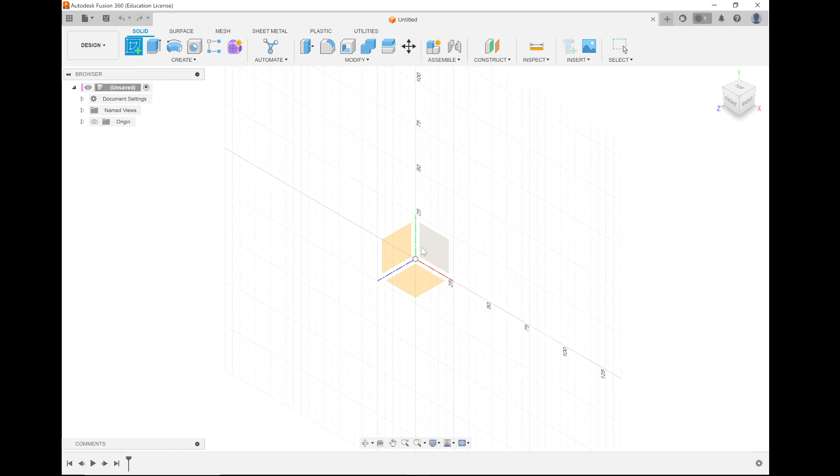So for this one, I'm going to start by doing my sketch button up here in the top left. Let me just check that this is showing up. Yep, cool. The sketch button, which is in the top left, you press this. I'm going to press a plane, this plane over here. So now I'm looking at it in a flat view. I'm going to do the rectangle.

So my general approach for this bridge, I'm going to do one half of the bridge first, and then I'll flip that so we can do the other half, and then I'll flip that again. So when I mean flip, I mean mirror. I'm going to mirror it first to get both halves of the bridge, and then I'll mirror it again to get the left and right side of the bridge.

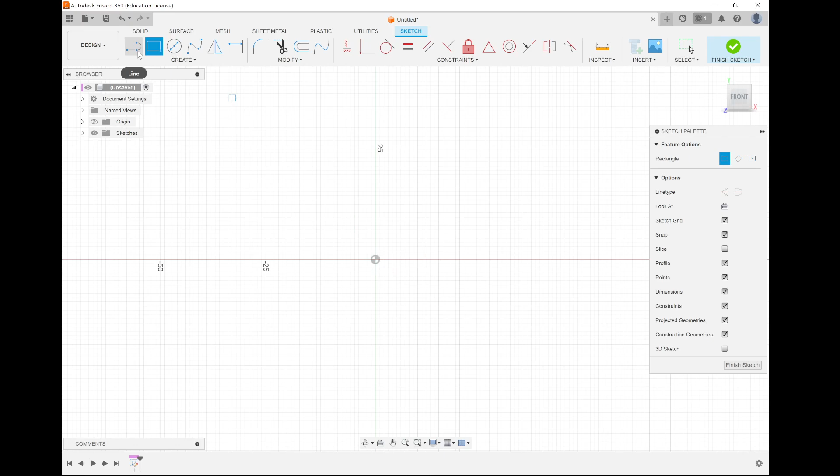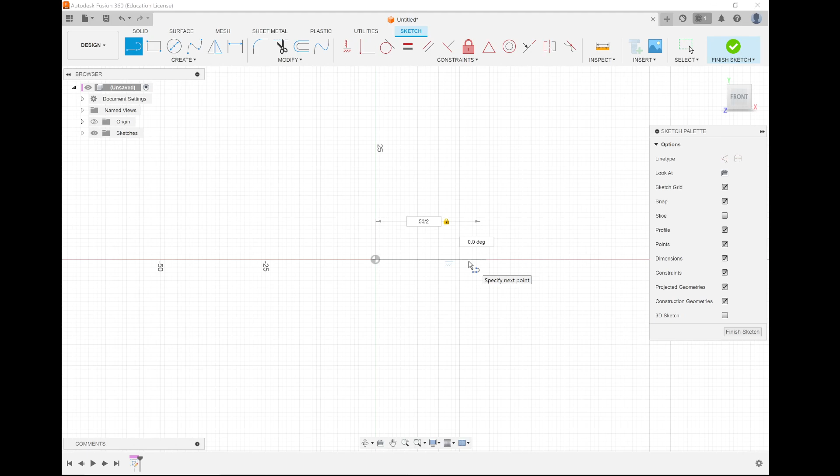So I'm going to start by, we know our balsa wood blocks are 5 by 5 millimeters. I'm going to pick a spot. I'm going to assume my bridge is going to be 5 centimeters wide. So if I'm assuming this crosshair in the middle of the page is the middle of my bridge, I'm going to get a line and send it out here. I'm going to do 50 divided by 2, which remember you can plug simple equations into your Fusion 360 distance line. So 50 divided by 2, press enter, and now I have this line here. I'm going to use this as a construction line for my bridge.

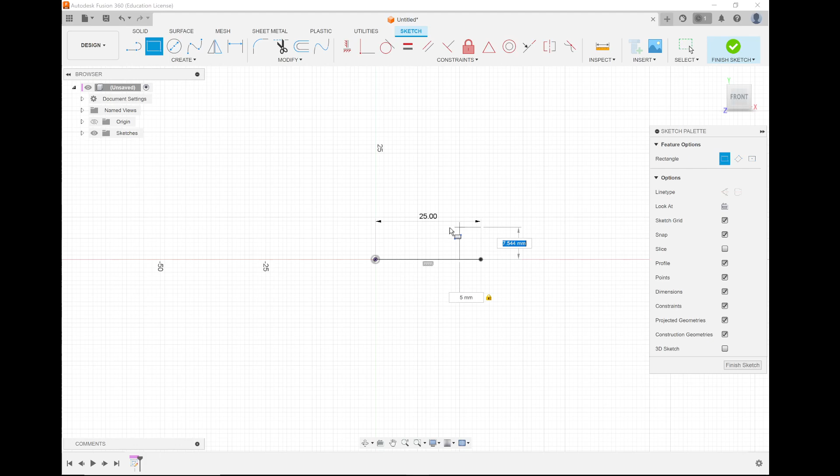I'm then going to press the rectangle button. I'm going to press this corner over here, and I want to do a rectangle going out this way. That's going to be my balsa wood. This one's going to be 5. I can write down 5, and then if I press tab, it goes to the other line where I can press 5 again, and then I press enter. So now I have this square.

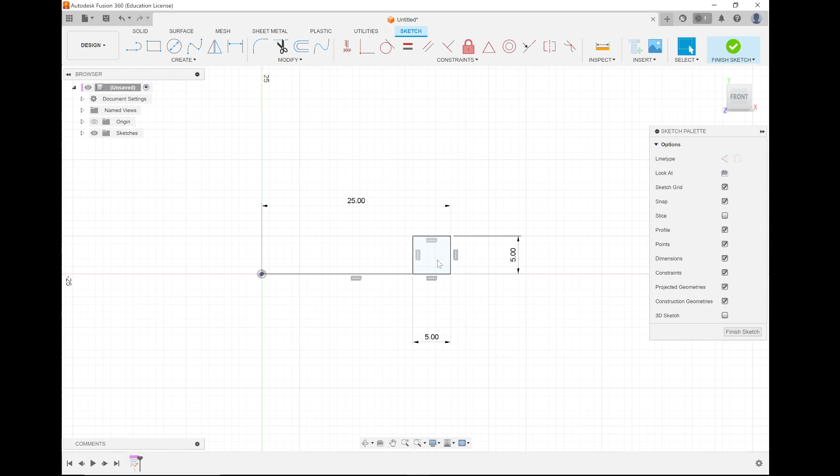In Fusion 360, this is a bit difficult for you to see on the projector, but when you look at the video, this over here is like a pale blue color. This pale blue color means that this is a closed shape, which means I can then turn this into another shape later.

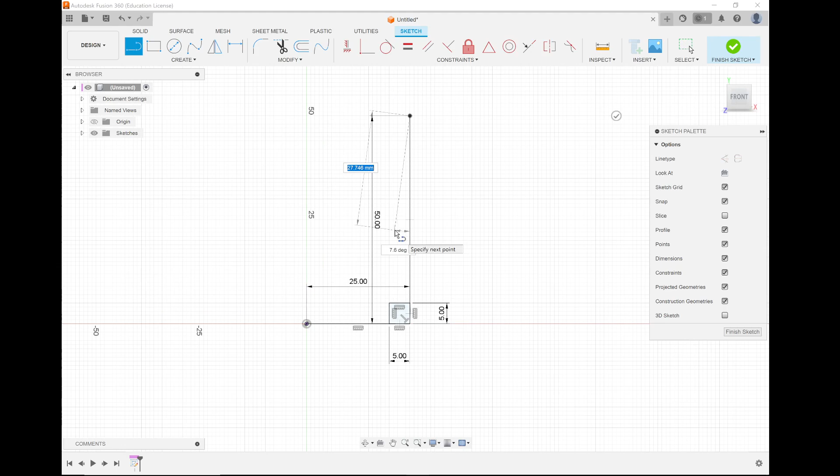And while I'm here, do I want to make the other shape as well? Yeah, I'll make the other shape as well. Let's say I want my particular bridge, if it's 5 wide, I want it to be just as high as well. So this time I'm going to go up here to 50. Does that make sense? Okay, I want to go up to here to 50. Press escape. Over here, press that corner. Go 5, tab 5.

So over this will be my 2 lengths of the bridge here, and I'll press finish sketch. So now I have these 2 lines over here. So these 2 squares that are from the central axis, they are 25 millimeters, let's say, to the right, and from the extremities, they are 50 millimeters from each other.

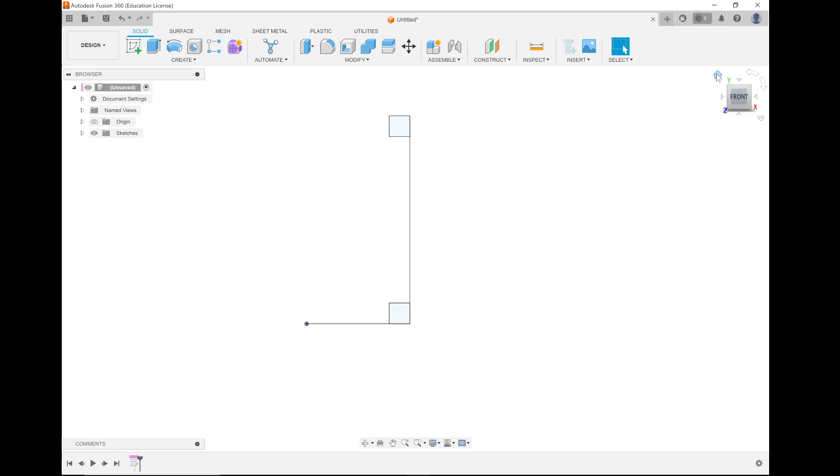For this sake, I'm going to press this home button over here to change our view so we can kind of see it in 3D. It's going to help us when we turn this into a 3D shape. Fusion is an additive CAD program. So if we press, we get a flat 2D object, and then we can turn that into a 3D object and manipulate that in 3D.

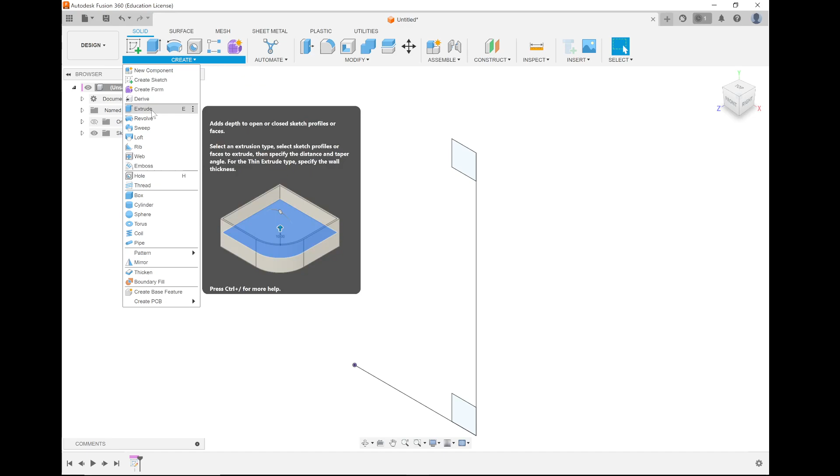So we're going to go to create, press extrude. For extrude, you need to press a profile. Any profile is any of those solid blue shapes that we made before. If I press this one over here, we see it goes into a darker blue. It shows an arrow. I can also press this other one. So now they're both there, and I can test it by dragging it out and see, yes, that's the shape I want.

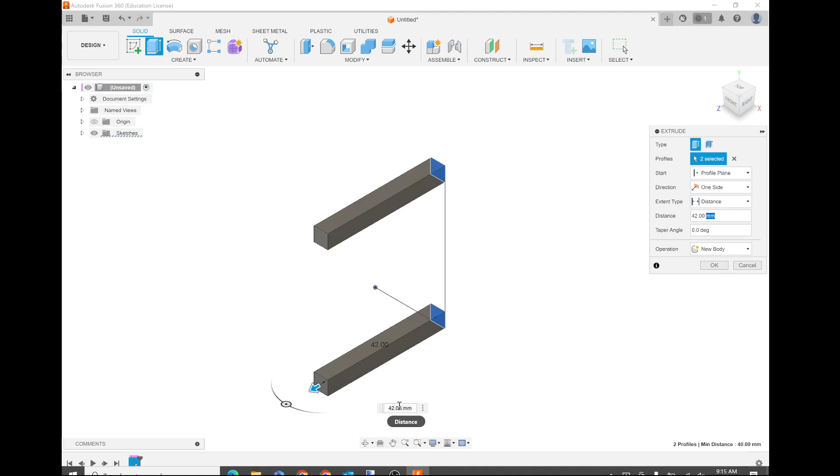What is the span of your bridges? 30 centimeters? All right, we'll just do 30 centimeters. So over here under distance, I can either type distance down in here, 30. We are currently measuring in millimeters, but Fusion's also smart enough that you can write 30 centimeters in here, and it will automatically convert that to millimeters for you. So that is a good feature.

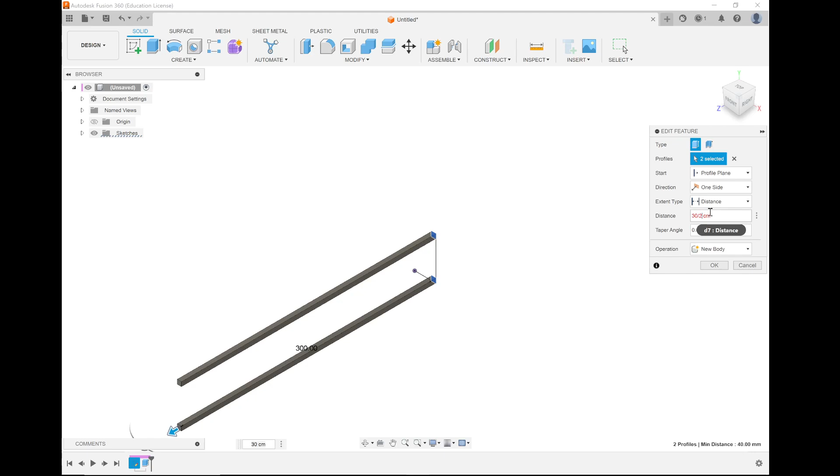But it's not actually 30 centimeters. I made a mistake because I want to do half of my bridge. So I can go down here in the bottom of the history tree, I can either completely undo my work, or I can right click this extrusion function and press edit feature. And then with the edit feature, I can change it here, 30 over 2 centimeters. Does that work? No, all right, it doesn't like that much maths. Okay.

So that'll be 300. You can do 30 centimeters divided by 2, so now that's half of the bridge that I want to do. Okay, now let's go and I'm going to make the zigzag lines.

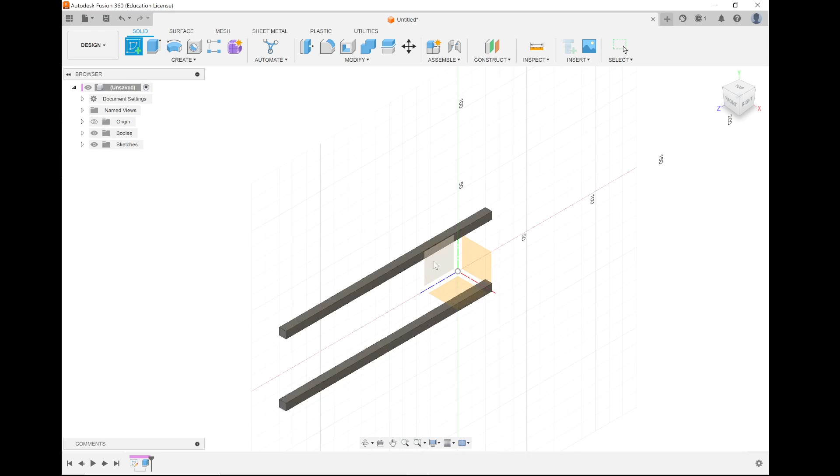A Howe truss, I think, is the one I'm going for. I'm going to press sketch. I want to sketch in the same plane that these things are on so they can be aligned. These are flat pieces, so I can actually just press them.

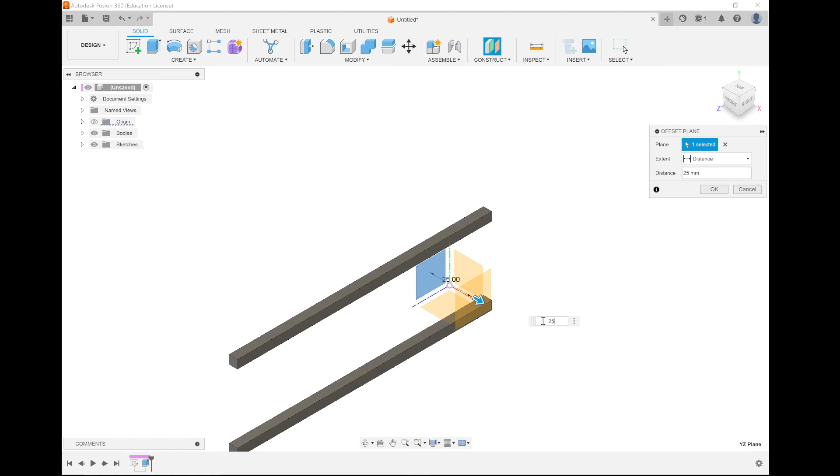Or if I couldn't do that, I could go to construct and I could press this plane over here and offset this plane by 25, so then I can work on this plane as well.

Let's make here sketchy, and this is where I'm going to go really fast and loose with the dimensions and stuff that's happening. I want to make a...

First thing I want to do is reference these particular shapes in my drawing. Now, am I able to do that? No. See how I get my mouse and try to bring it close to the point? It doesn't actually bond with the point there, with the line. It's trying to attach to the grid.

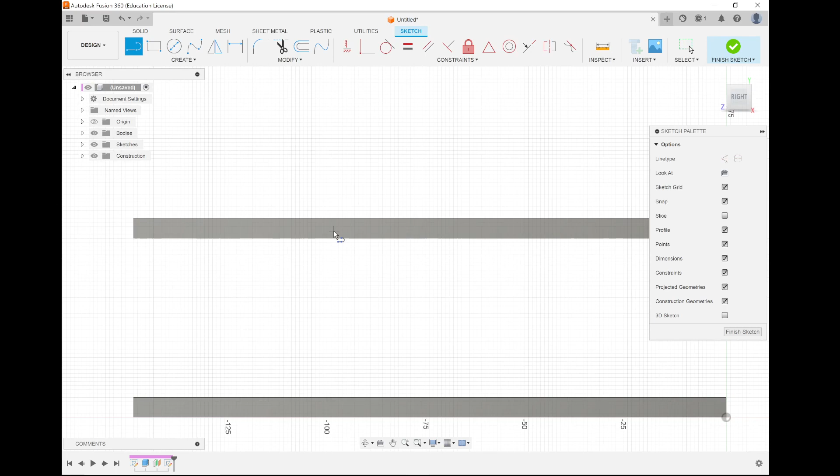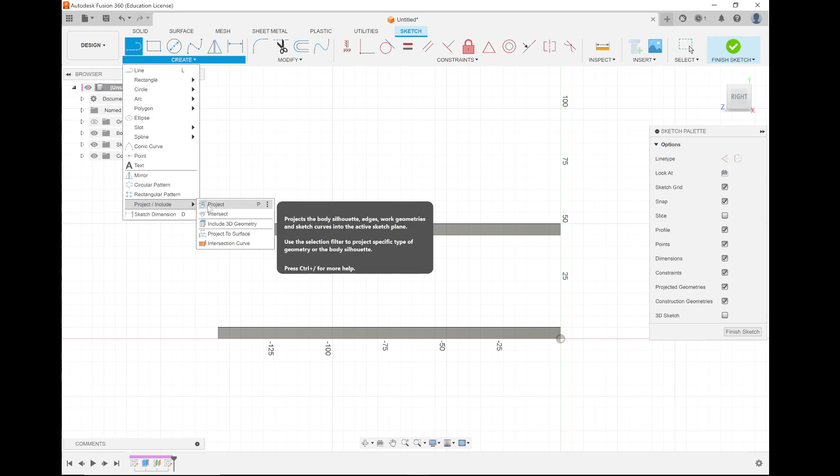But I want it to actually attach to those shapes because I'm going to reference those shapes later in the length. So here is an important feature of Fusion: I need to include those shapes into my drawing. Fusion tries to be smart, where if you start a sketch on a shape, like actually on the shape, it will include that. But we did it on a plane, so we want to say, well, anything we can see, we want to include that in our shape.

So we're going to use the project and include, the project button over here. What that does is we can click all these buttons, and it's basically saying what I can see from that view, I want to use that geometry to reference my drawing. So now I press OK.

Some things have changed. Now we have little purple lines. So you know, purple line means the projection. Now as I bring my mouse across, see how I have that crosshair now? It's changed, so that line is now an actual function in our drawing.

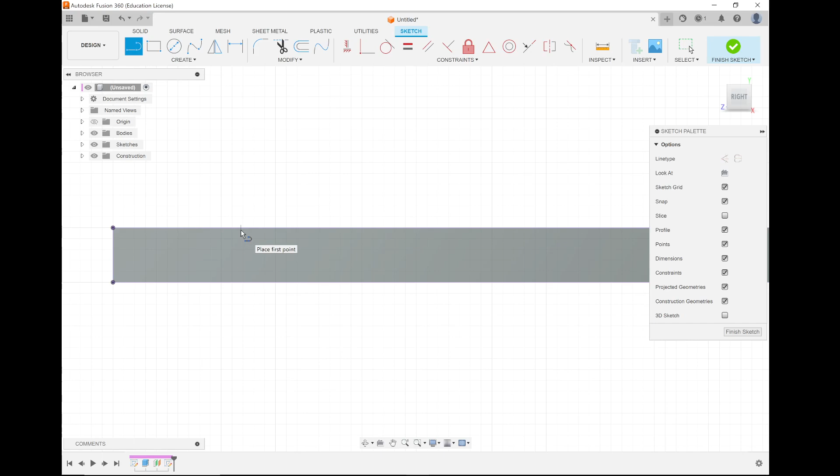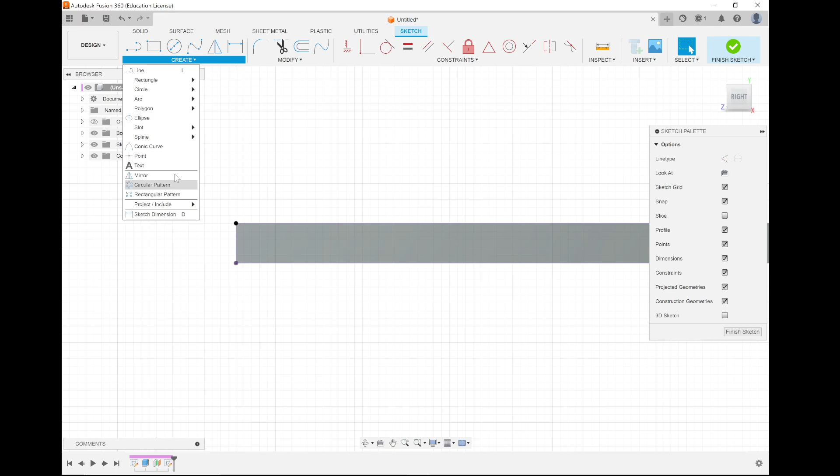Why that is relevant is because I want to do this: I want to create a point over here, and then press escape. And then I want to go and do a rectangular pattern.

I want to press this point over here, can I select that object? Select that point. I want to pick the direction I want that to go, and I want to go this way. I want the extent to be minus 150. No, I want 3.

One, 2, 3, 4, 5. That's too much. One, two, 1, 2, 3, 4, 5. There, that'll work. All right, so we've got 6.

So now I've made 6 dots over here by using the rectangular pattern. So when I do my zigzags, this is where they're going to begin and end. I press the dot, I press the direction I wanted to go, and I want to go along this line. Pick the extent I wanted, which is 150.

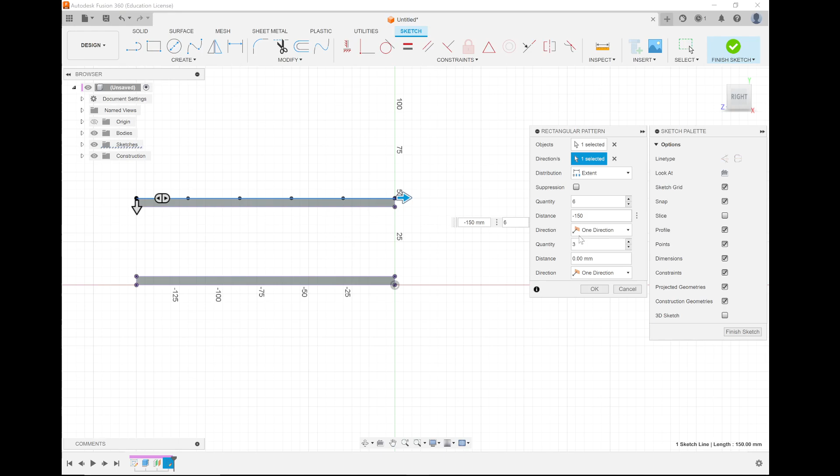And then I manually picked 6. I'm not going to use all of these dots, but I will do the same thing. So I say dots when I mean points. I'm going to do the same thing down here.

It should be faster: rectangular pattern, select the point, select the line, and then we'll go 6, and then we'll go 150. Okay, so now I've got these.

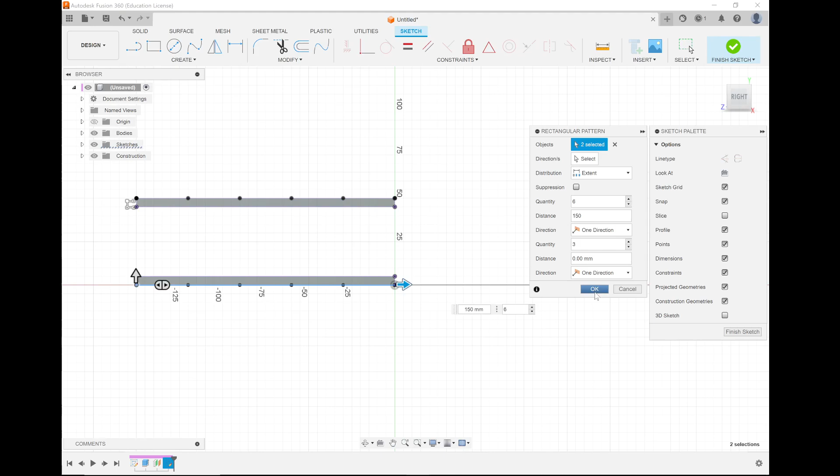Phew, okay, I don't know why it went twice. Oh, I think it may have copied the line. Not a problem, we can just ignore that part. So now I want to go here with my line, I want to start making my...

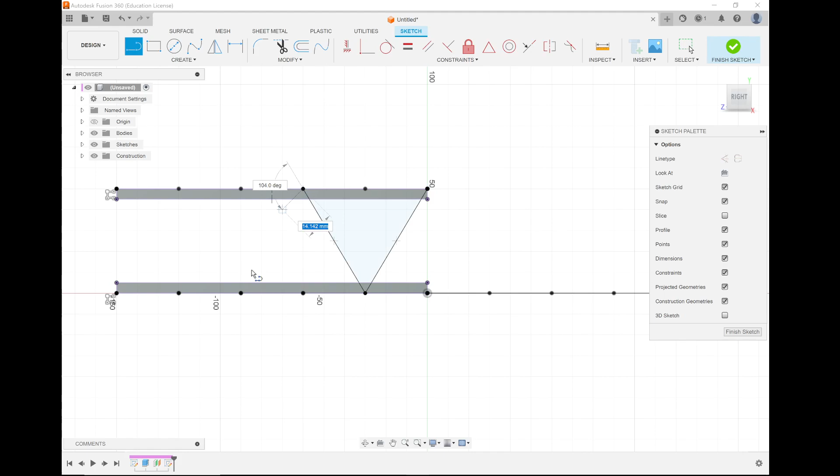And again, this is very just quickly, these lines I'm doing here. These are going to be the zigzag lines of my truss, so these are where my diagonal members are going to be.

Now I want to give them a thickness. I'm going to use the offset tool. If I press the offset tool, I press this shape over here, I'm going to make this offset. Now, this is where this dimension is relevant.

If you draw a line, you've got to remember you've got trigonometry. If I measured 2.5 millimeters from left and right in the Z plane, according to our drawing up here, that's not going to make the member 5 millimeters thick. So by using the offset tool, it's making it parallel, 5 millimeters thick, which is what we want.

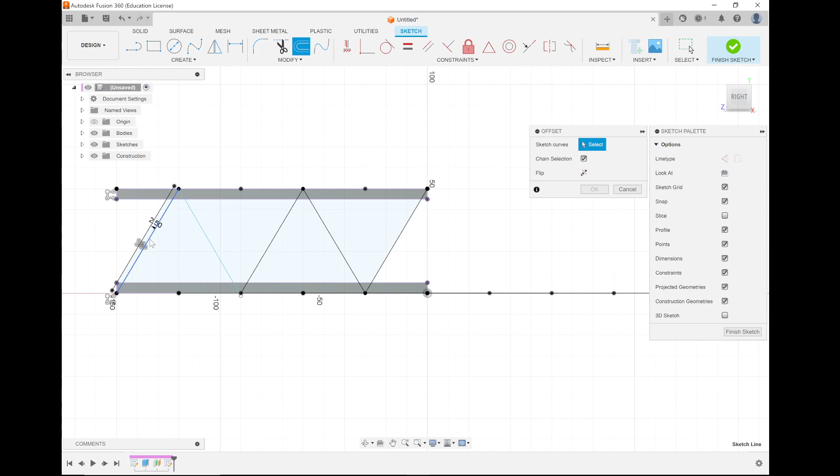Offset position, 2.5. Press enter. And then I'm going to do this offset as well, 2.5, but I'll flip the direction. And so that's going to be the thickness of the members that I want.

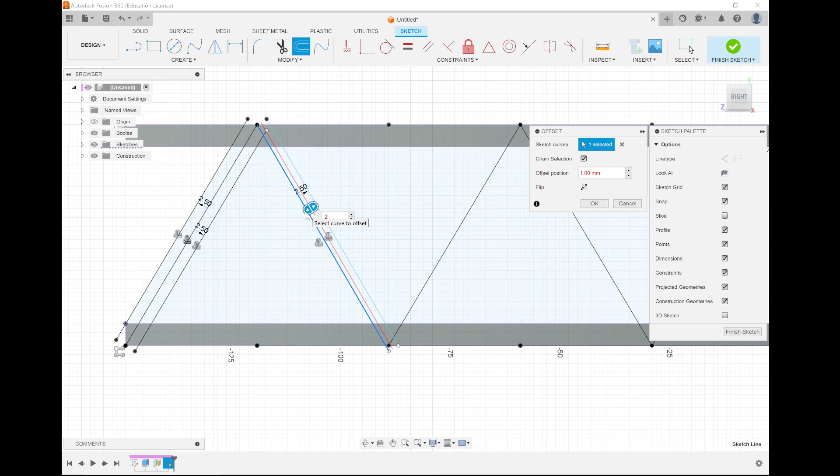I could just manually do this, 2.5. But remember, this is a speed run today. Minus 2.5. Yep, okay, so because this is a speed run, I'm going to try to do this.

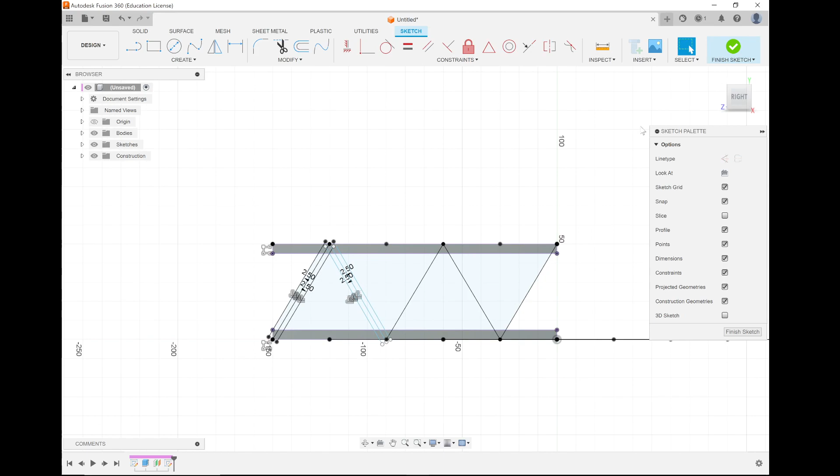Can I do this? What distance does that have to be offset? That distance, inspect. Oh, 60, easy, okay. I'm going to try to do this faster, so I'm going to actually finish the sketch at this point and extrude these shapes here that I made.

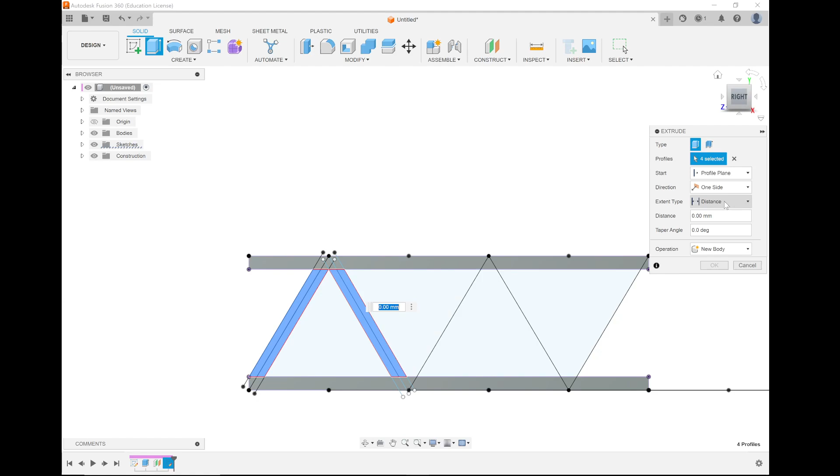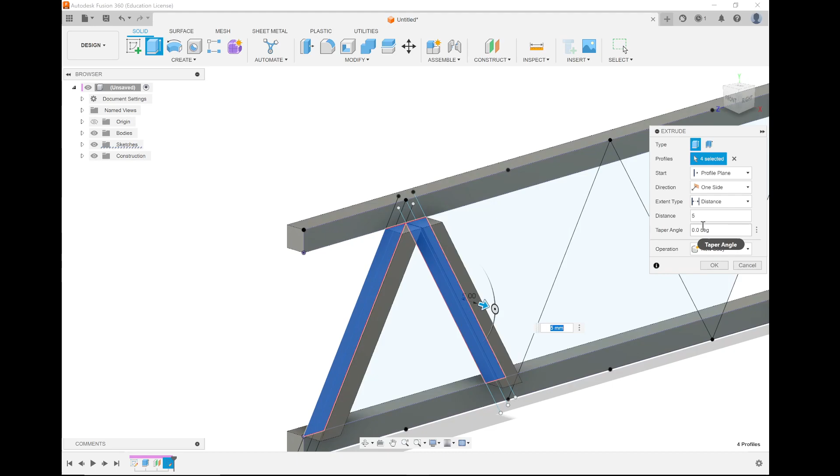Everything's fine, it should be able to do these two. Thickness is going to be 5. Now, as you probably remember, when you extrude an object, if it's touching another object, it's going to try to combine them together. Right now we can see it's not touching, it's going in that direction. We can flip that direction by doing the arrow in the other direction, I believe. So we're just going to be -5, -5.

And so over here, it naturally does a join. I don't want to join for this case, I just want to do a new body, because I'm going to copy these and then later I'll join them together. So I've got this shape over here.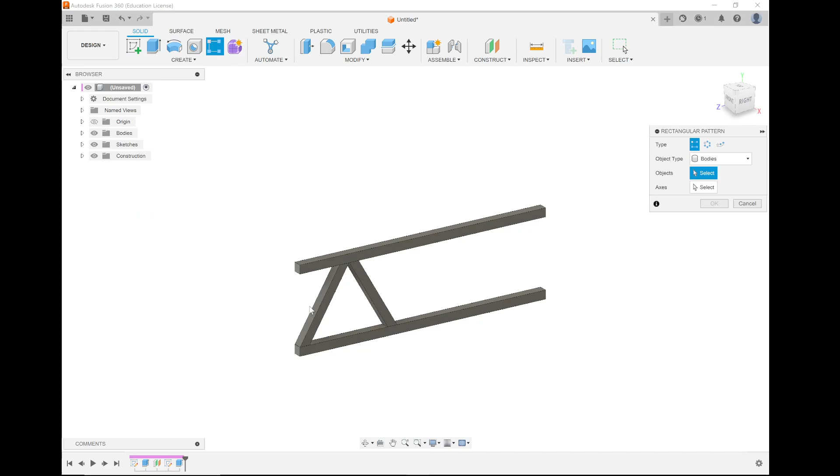We can do our same thing, a pattern just like we did with our sketch. We can do a pattern over here, rectangular pattern. The bodies we want to copy are this body and this body. The direction we want them to go through is this one over here. This time I don't want to use extent, I want to use spacing, and I want them to be spaced 60 millimeters apart. Press OK.

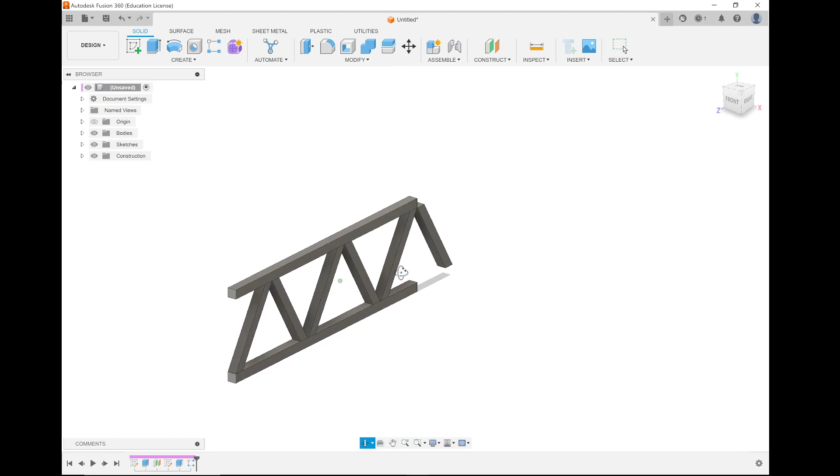So that's the start of my truss. And then I can start to mirror this by pressing the mirror function. I think I can just press everything, and then mirror plane over here. In this case, I don't care if they're joined together because it's going to be the end of my bridge. Join. All right, we got a mirror warning, but that shouldn't matter.

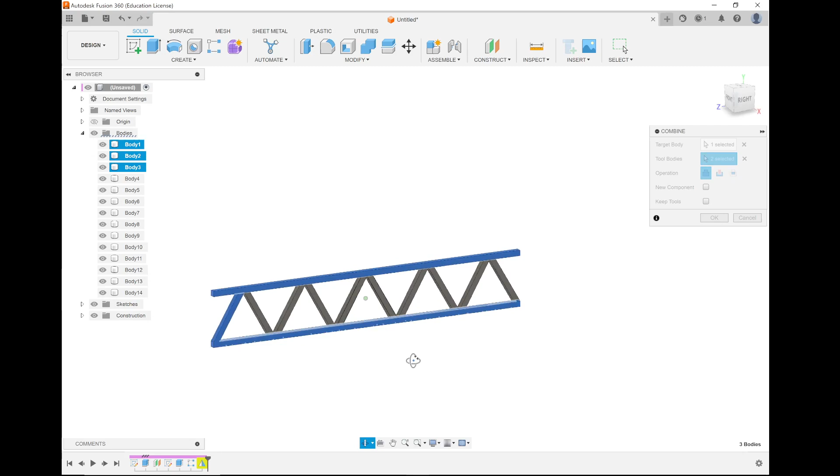And now these are all individual bodies. For the sake of my drawing, I'm going to actually combine them all together. So I go to modify, combine. The target body can be this part, and the tool bodies can be everything else. I have to manually select them. 1, 2, 3. Select all the other bodies and press OK.

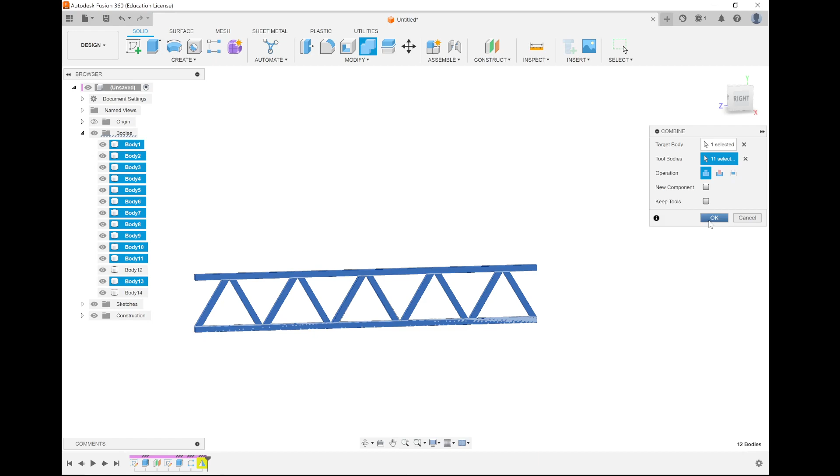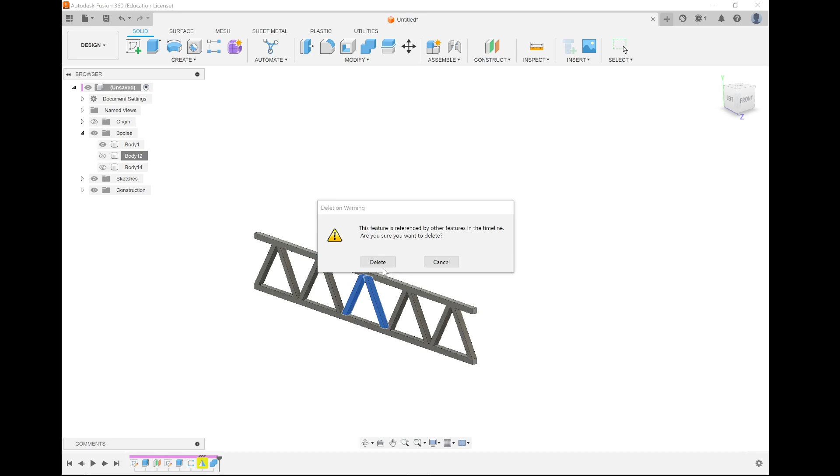So now, were those not touching? These are, okay, that shouldn't matter. These are the two that were like hanging over the other side when they got mirrored, so I don't think we need to worry about these two. We can probably delete these two bodies. Right click and delete. Yep. Oh, no, we cannot delete them. Let's just combine them in then.

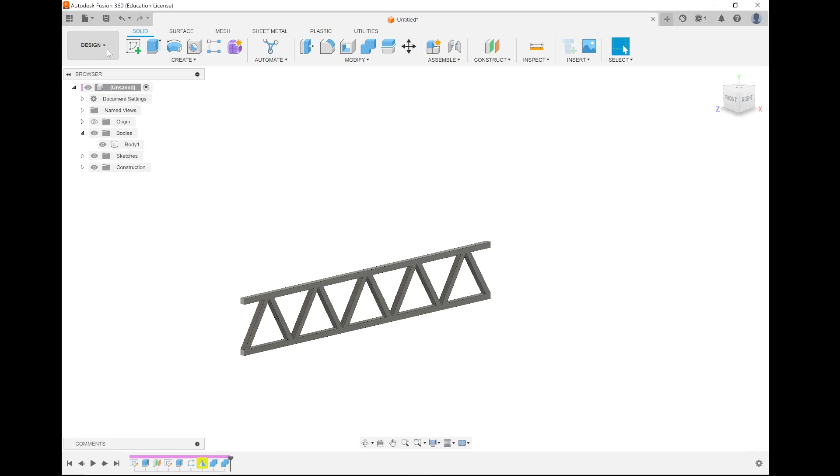Combine this body with these two. Okay, we have one body here. Now we have to make the other side, and we have to make, so let's just do this by eye. We will go over here.

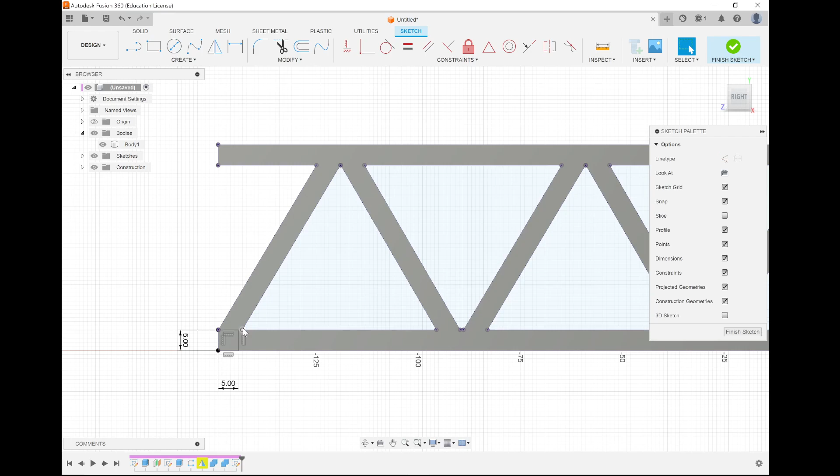We've got to do our project and include. Project this shape, yes. Let's just make these squares. We've got one square over here. This should be 5 by 5. Oh, 5 by 5. And then this one over here, I could probably measure this more accurately, but I'm just going to guess it.

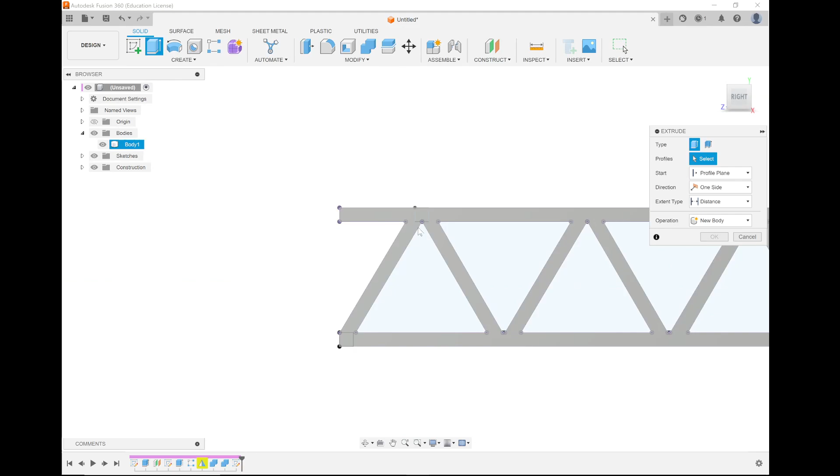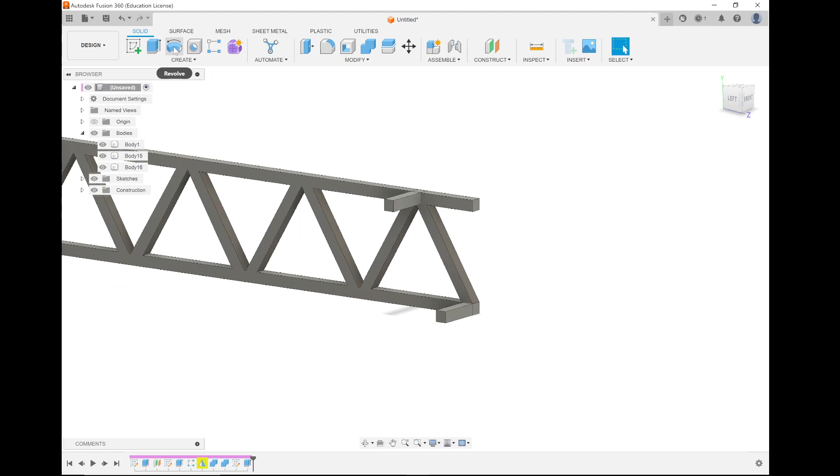Five by 5, done. We will go and extrude these shapes out that we just made. Uh, 25, and we will again make them a new body, so there's no issue there. New body, okay. And then we're going to copy these as well, like we did with the previous ones. Pattern, rectangular pattern, this body and that body.

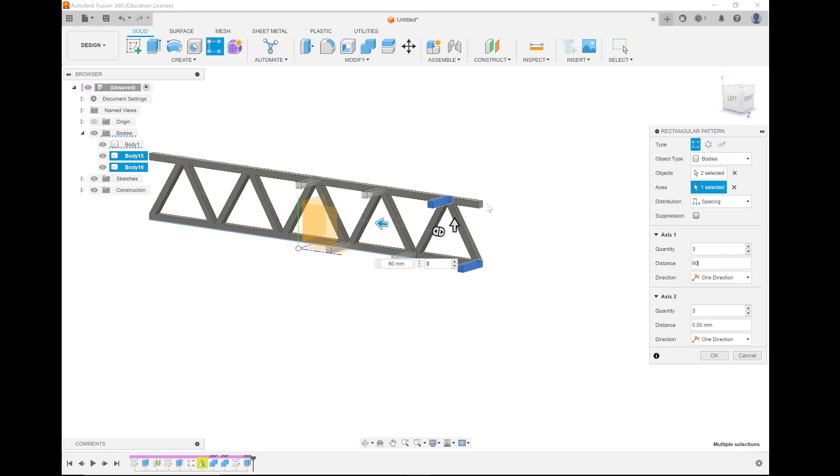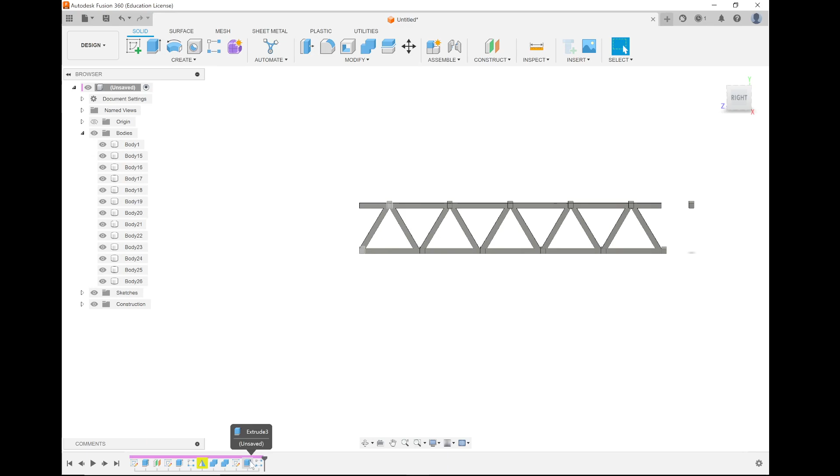The axis we want is this axis over here. The spacing, what's the spacing we want? The spacing we want is 60. And the quantity we want is, we'll just go through the page and we can delete the ones we don't want later. Do we need slightly less than that, maybe? What do you reckon? It's 55 instead. Yeah, it is.

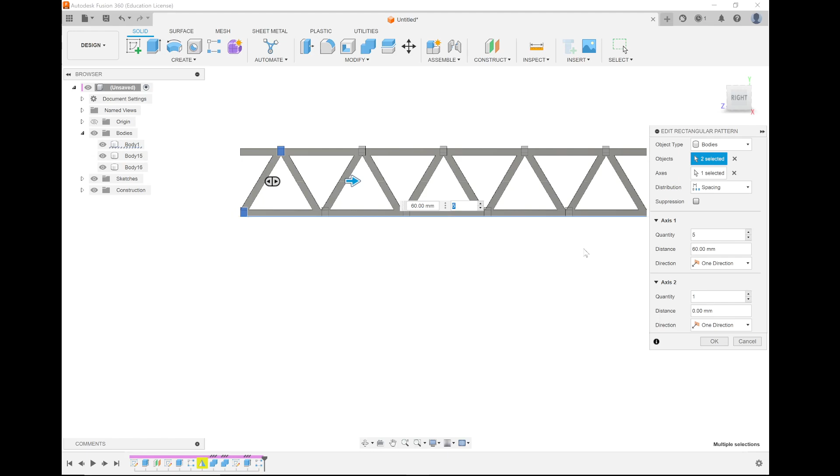Alright, it's not going to work. These things are not aligned. Okay. With this sketch, we'll just make more of the squares. Must be these over here are not really aligned.

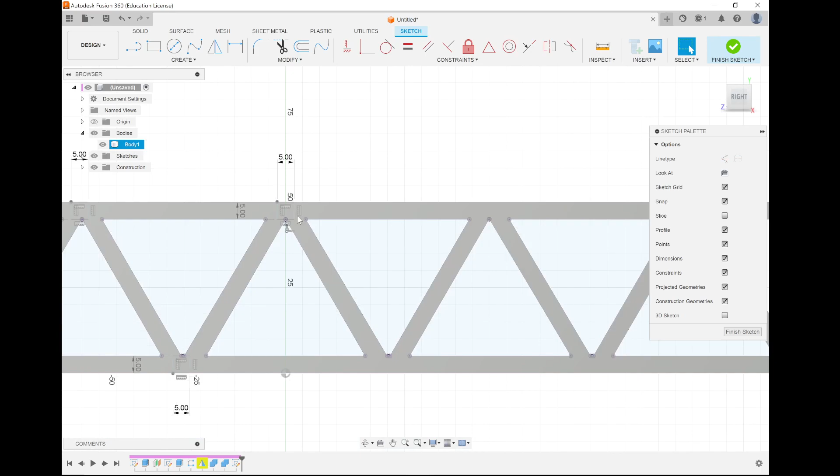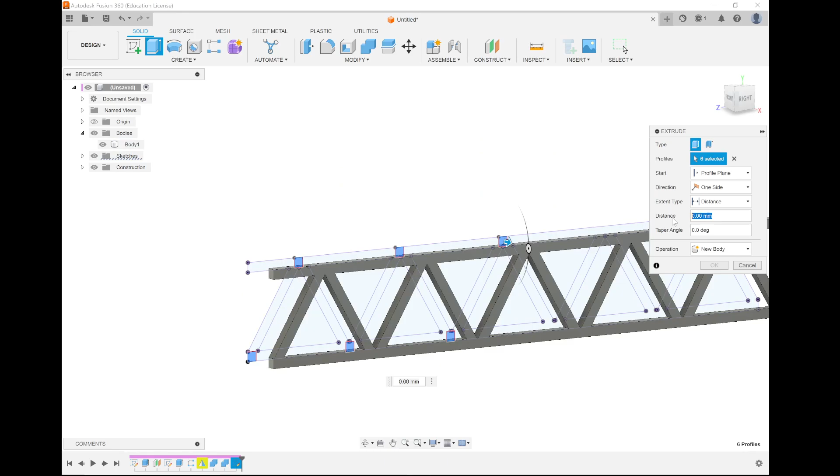Alright, we'll do half the bridge. We'll go this one, that one. 25, and we will just join these together, okay? And then we'll do the same mirror trick over here. We'll get this body, the mirror plane will reflect it, should be symmetric.

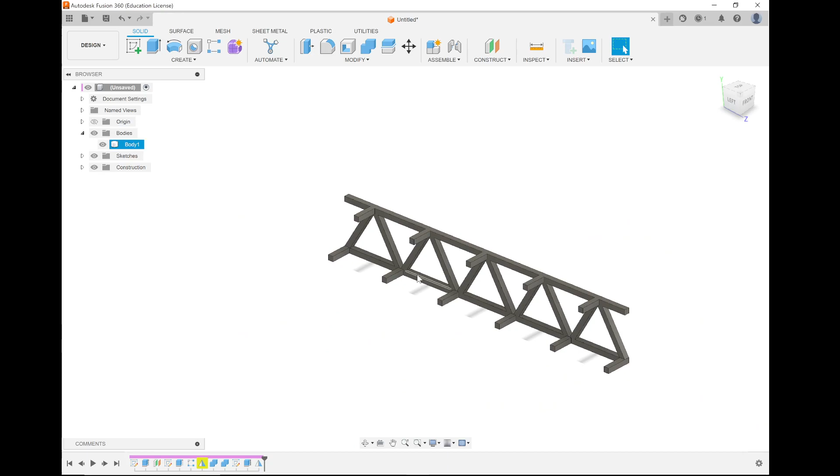Okay, we have both halves of the bridge now, and then we will also mirror this part over here, mirror this whole body, in this plane over here. And then we have that part of the bridge.

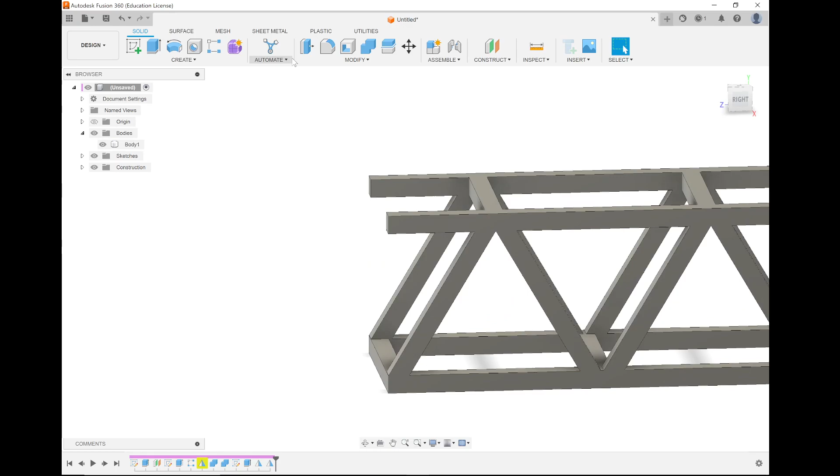And then now in the last 30 seconds, to finish it off, we can get rid of these two parts over here. We can do something like this. We can say split body. We want to split this body with this splitting tool. We can split by this tool over here. And if we press OK, it should cut these two corner pieces off.

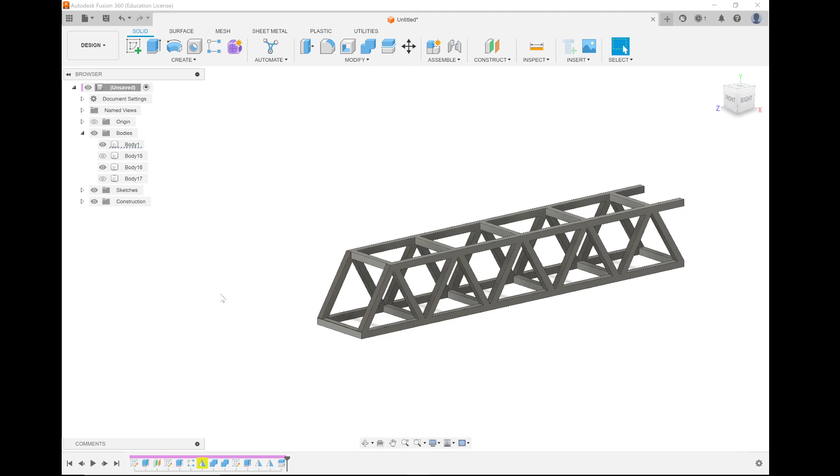So then we can then hide this, and we can hide this particular part there. And we can do the same thing over here, split this body by these tools over here. Ooh, almost done.

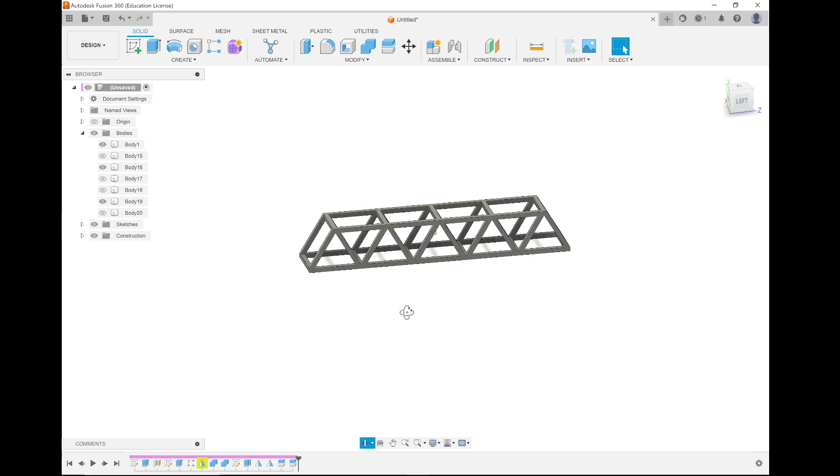And there you go, that's the basis of a fast way to get your bridge done. You'll change it to your particular shapes. The next lesson we're going to go and get this bridge ready to start doing simulations on. Let me pause this.